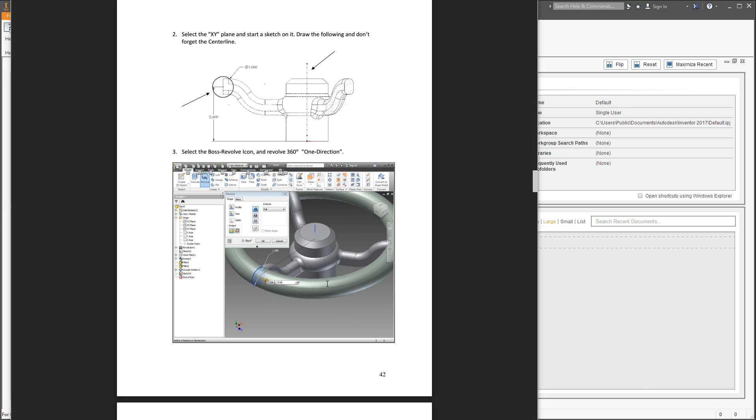Exercise 4, Autodesk Inventor 2017. In this exercise, we're going to take a look at how to build this hand wheel that you see right here. And so we'll begin on page 37 in the book.

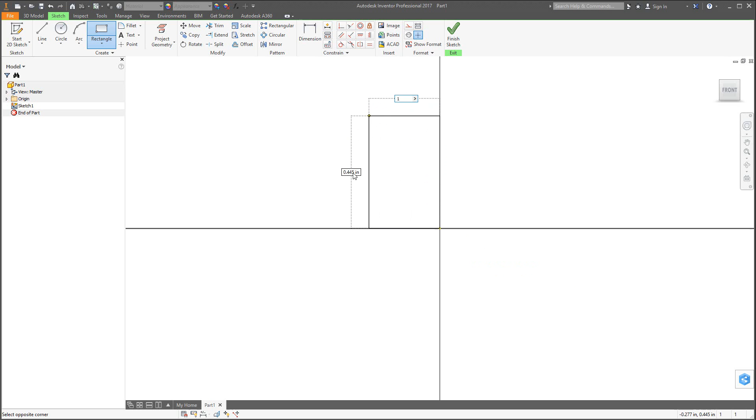You could go ahead and type in 1, and you'll see it will feed into that box, and then click in this box, and this will be 3 inches in height. Now you could click on the front box over here on the right to maximize it.

The next thing we're going to take a look at is the sketch chamfer. Underneath the fillet tool, to the right of it, there's a little arrow. Click on that, you'll find chamfer. This is different from the feature chamfer we've seen in previous exercises where it's actually on the model. This is actually on the 2D sketch.

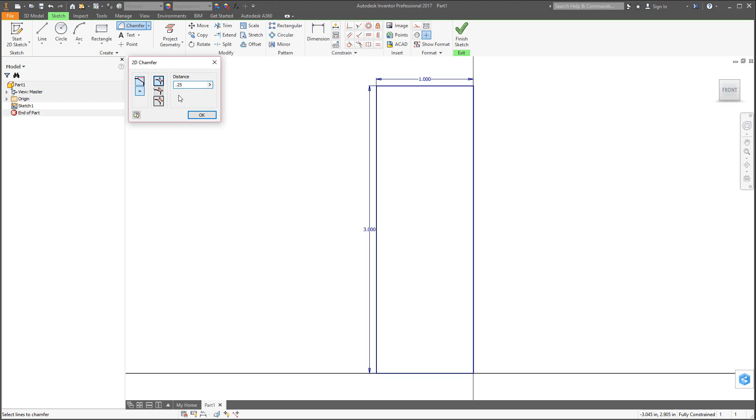We want to have it set to distance at 0.25, and select these two lines at the top and the left side, and you'll see it will create that. Hit OK. The little FX essentially means that 0.25 is dependent on this 25.

So whenever it changes, let's say we change it to 0.125, they both update.

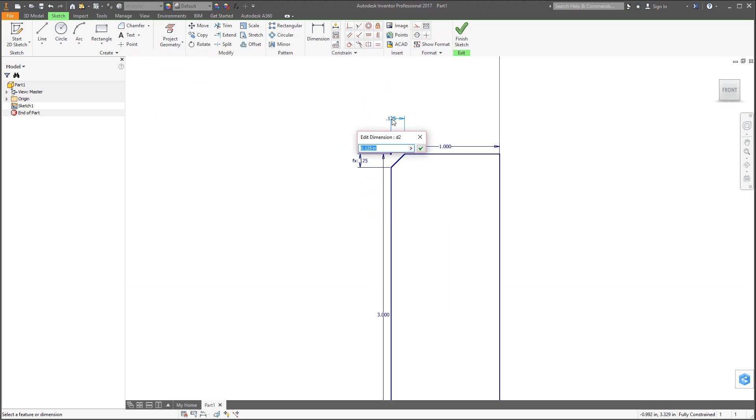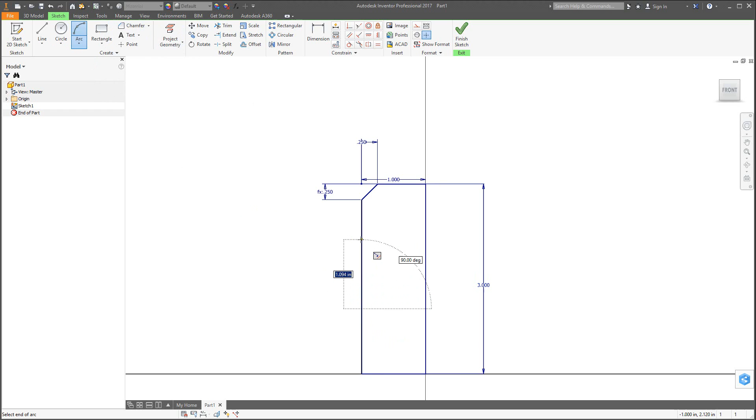Okay, moving along, I'm just going to go ahead and move this out of the way, and we're going to draw an arc. Hit the little arrow underneath the arc buttons and find 3-point arc. Click on the edge of this model, drag up about 1 inch, click again on the edge, and drag out a short arc, not a big arc, just a small one here.

Go ahead and type in 0.5. Actually, just click and we'll add it later.

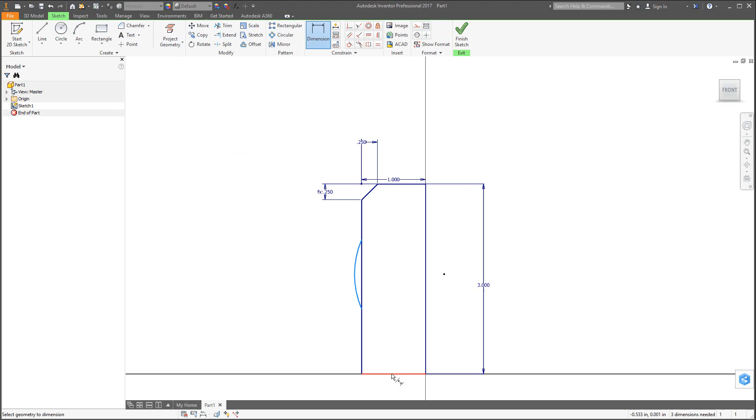Now go to the dimension tool and dimension that arc to the bottom edge, and that's going to be 1.75. Then click on the arc again and dimension it to this left edge, and that's going to be 0.25. Finally, dimension the arc itself at 0.5.

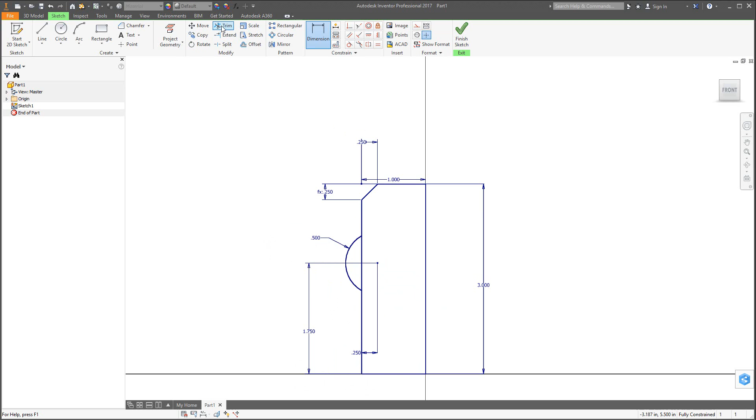Next thing we need to do is trim out this section. So go up here to the trim tool, little pair of scissors, click on it, and just select this intersecting geometry. It should cut up to the next corners.

Now we could go ahead and revolve this 360 degrees. So we'll go to 3D Model, Revolve. I'm going to click on the Home button up here in the upper right just to maximize the screen.

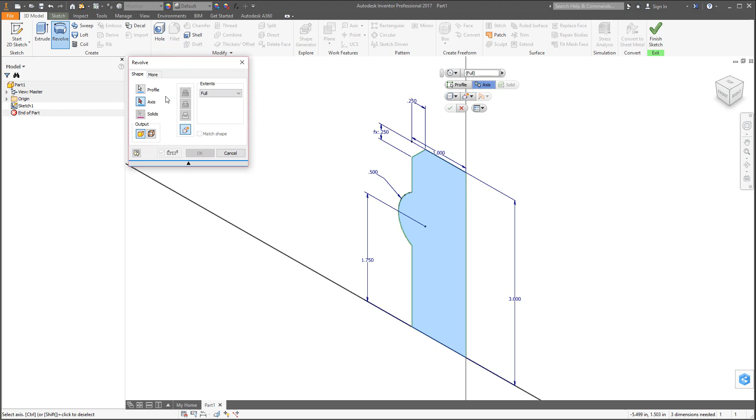All we need to do is select, we'll hit this little arrow here. We need to select the axis. So click on Axis and just select this edge, and hit the green check mark or OK.

Now let's go ahead and start a sketch. Hit the little plus symbol to the left of origins, and we want to go ahead and select the XY plane once again, and we're sketching on that.

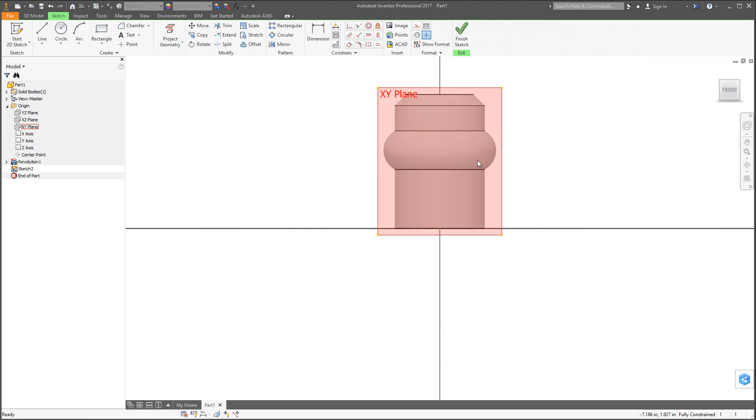Now we could take the line tool and draw a line right in the center here and up. Have it poke out above the top of the part and hit Escape. Now select it after you hit Escape and select this tool here to change it to a center line.

Now go to the line tool and get on that line and click and drag across and make a 2-inch horizontal line.

Then hit Escape. Let's go to Dimension and dimension that line to the bottom edge of the model at 1.75. That way we know we're centered on that hub section there.

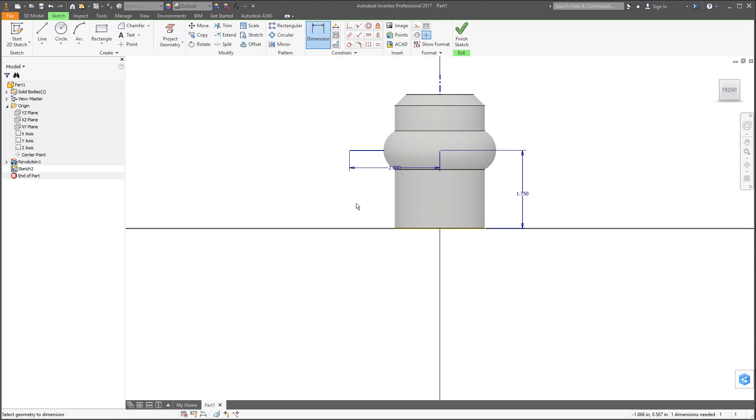Let's now go to the tangent arc tool. On this endpoint, click and drag to the left and up about a 1-inch arc. Okay, we could go ahead and type in one and leave it less than 90 degrees. So one, and mine's like 68 or 70, that's just fine.

Hit enter, and off that one, click and drag off another arc. You can do one of two things: make this 1 inch again, or you could go ahead and add a constraint. I'm going to go ahead and type in 1 inch and hit enter.

Notice that I have tangency symbols located here and there. We will need one up here once we draw a line. So go to the line tool, and off of that line, drag a horizontal line across, and then hit escape. Let's just click on the tangent icon up here and force a tangent relationship between the two, and there you can see that will enable it to be very smooth. I just hit the escape key after that.

Okay, now go to the dimension tool, select this line here and the 2-inch length line, and drag your dimension to the right, and that will be 1 inch.

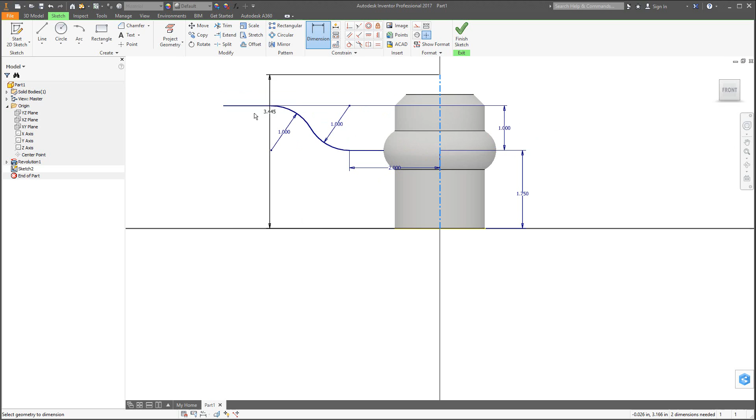The last dimension you could select is the center line and then this endpoint. Now it's going to bring up a diameter, which we really don't want, but that's okay — you could switch it later. We're going to click to drop it, and this needs to be 8.

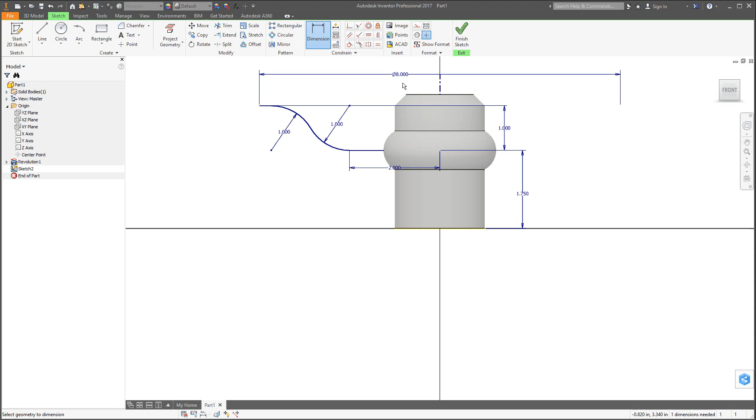If you didn't get a diameter, that's because this was not a dashed line. If it's not a center line, if it's just an object line which is solid, you won't get that — in that case it would be 4 inches. Go ahead and hit Finish Sketch.

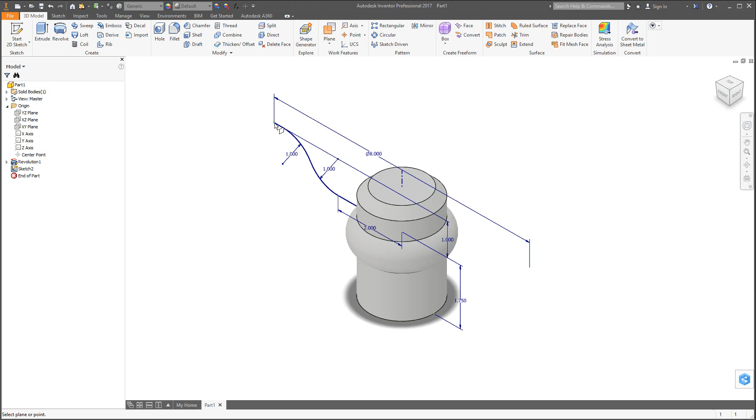Now we're going to learn how to make a plane perpendicular to this point by offsetting. Hit the little arrow underneath plane, and you'll see parallel to plane through point. Select the endpoint where we want the plane to rest, and over here on the left select the YZ plane to project it. Now that you have the new plane there, select it and start the sketch tool, create sketch.

Over here, we could click on this little arrow on the left or right and rotate it until we could see the left side, and then zoom up.

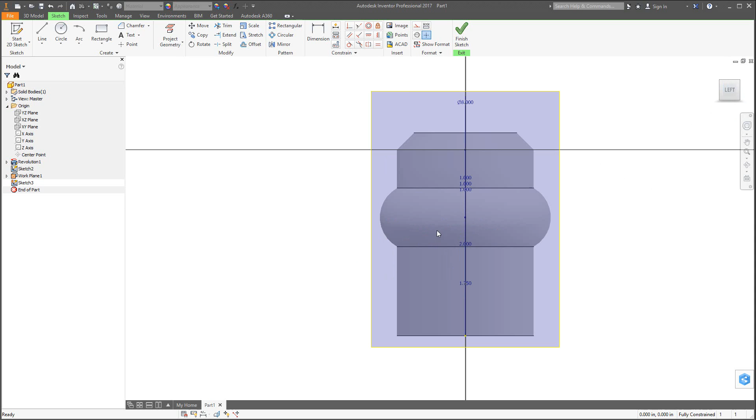Now we're going to use the center point arc tool. Glide up to this point right here, and when you get the dot to highlight, click, drag across, and make it 0.25. Then hit enter, drag an arc over the top, and we want it to be 180 — once it reaches 180, you could hit enter.

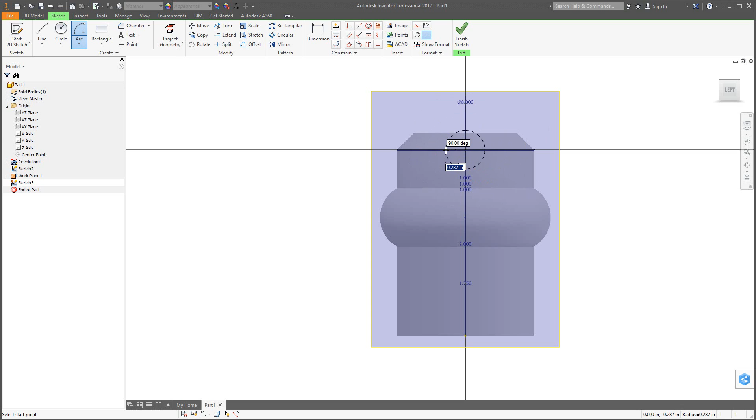Oops, that's not what I wanted. Let me try that again — 0.25, then drag it over the top, and we can type in 180 and hit enter. There we go. Now if it comes out incorrect, hit escape, select it, delete it, and try it again.

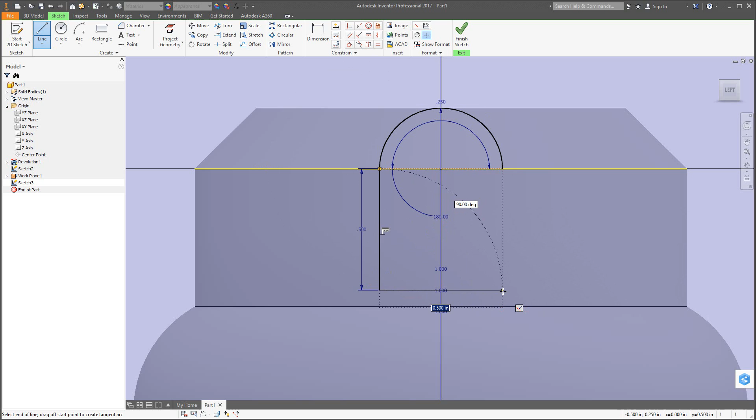Go to the line tool now and draw — I'll zoom up here so we can see this a little better. Click on this vertex here, that arc, drag this straight down, 0.5. Drag this across until you see the little inference line and you're horizontal. If you don't see the inference line, look carefully, make sure you're right below that vertex, and finally close this off right there.

Let's add one more dimension and select this bottom, click to drop it, and hit the green check mark — it should be 0.5. Also, we want to make sure that this maintains a tangent relationship, so click on tangent, click on this line, or this arc in this line. Oh, hit cancel, we don't need that because of what we just did here. Never mind. Okay, now let's hit Finish Sketch, and we could see our profile there.

We can now go to Sweep, select the profile, and then click over here on Path and select any line. Oh, gotta click on that again — select any geometry when it turns red on the path that we created.

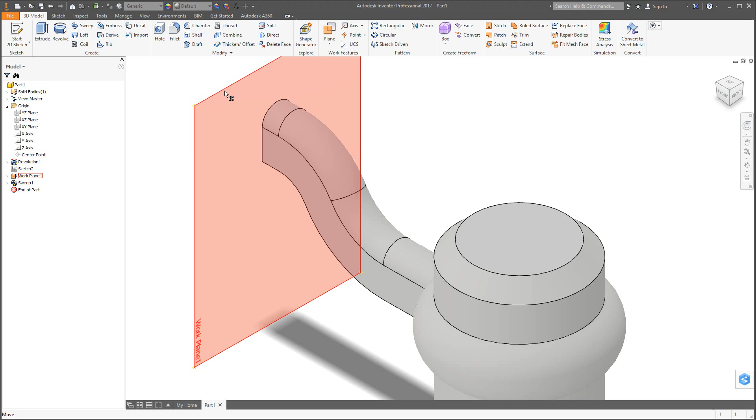Hit OK. Hide the plane by right-clicking on the edge of it, holding down that right mouse button, and you'll see visibility — release it on visibility and it will hide that plane.

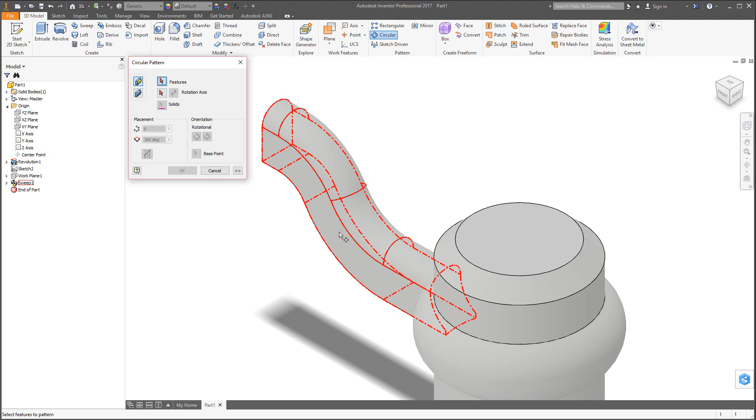Now we want to pattern this. We want 3 spokes, so we're going to go to circular pattern. The features we want to pattern are the spoke, and actually I forgot, I want to add some fillets — I'm going to hit cancel there. First go to the fillet tool, and the first radii are going to be 0.188, and select this edge here.

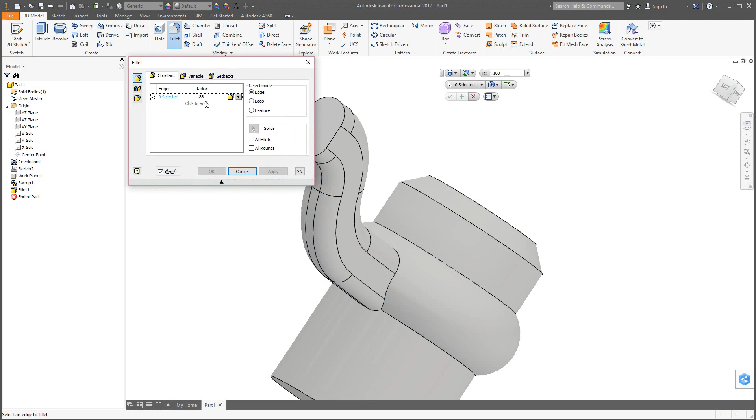If you want to rotate to the underside so you can see it better, select this edge right here. Hit apply. Now set this to 0.25 and just select this top edge — you don't want the bottom edge.

Hit OK. Now we could go back and try our circular pattern. Click on circular, select this side face of the spoke, select one of the fillets, the 0.188 fillet right below here, and then select this 0.25 fillet right here. You could also select them from the browser.

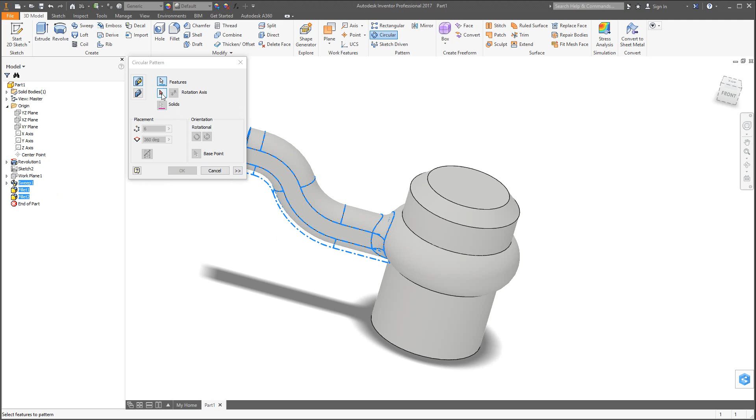Once you have those selected, go to the rotation axis button and click on it. Select the cylinder at the bottom for the rotation axis. Set the placement underneath here to 3 instances at 360 degrees and hit OK.

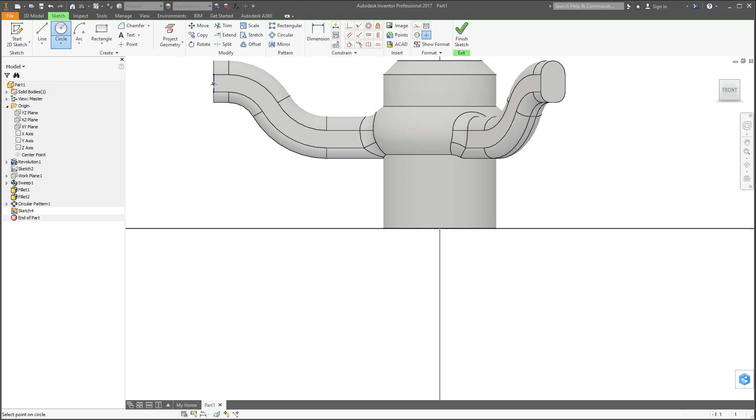Now select the XY plane and start a sketch. Take the circle tool, align it to the midpoint of this edge on the left, drag out a circle and set it to 1 inch.

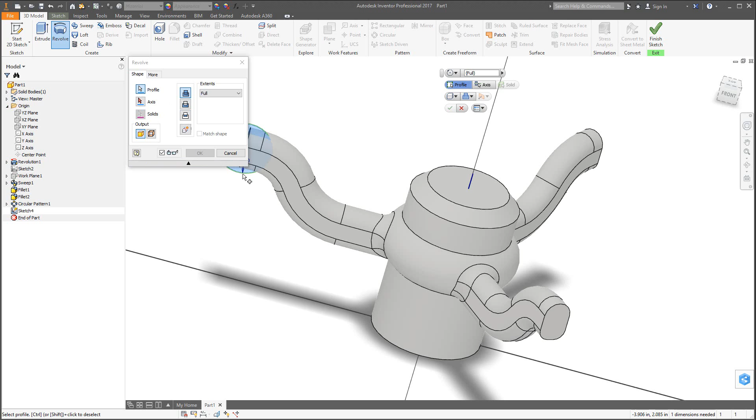Take the line tool and draw a line at the origin and have it appear above like so. Hit escape, go to 3D model and revolve. Make sure you select the profile and then click on axis and select that line that you just drew, and hit OK.

Fillet with a 0.25 radius the additional 3 edges.

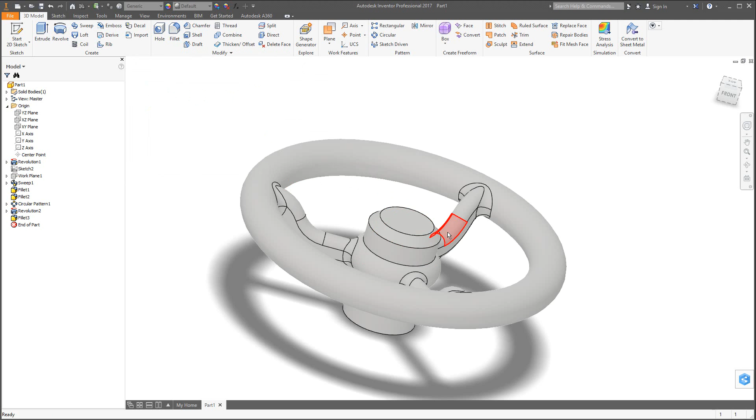And apply. Move it around to the base and we're going to take a look at the hole tool. Click on hole, select counterbore, leave the default settings here with the exception of the termination set to a distance, and the distance will be 1.5.

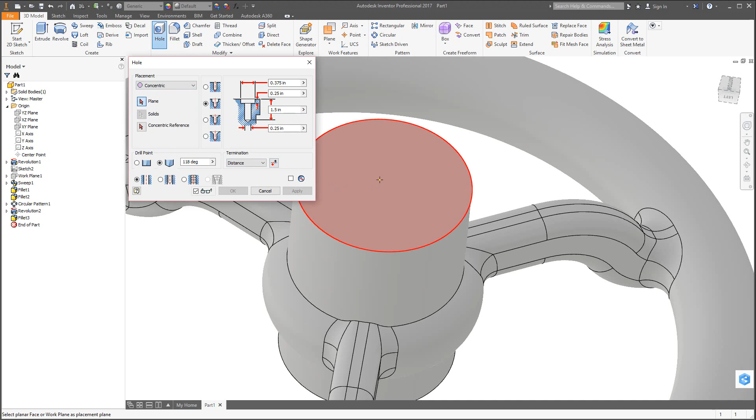On the left here you'll see there's linear from sketch, concentric, or on point. We want concentric. Go ahead and select this face. And now over on the left, select the concentric reference button, and select this cylinder. It then will center it, and you can hit OK or apply. And now we have our countersink, or counterbore in that case.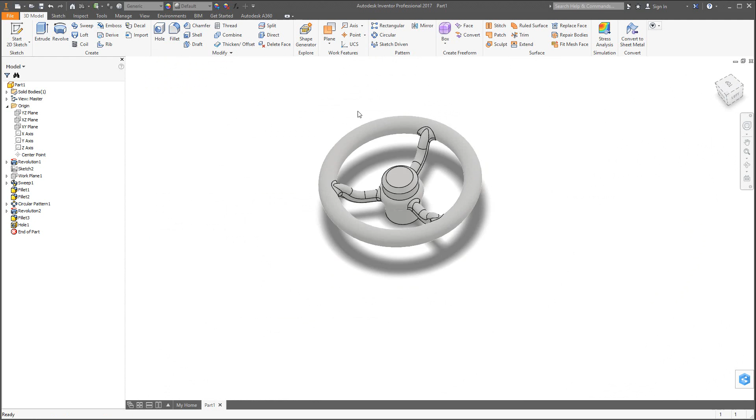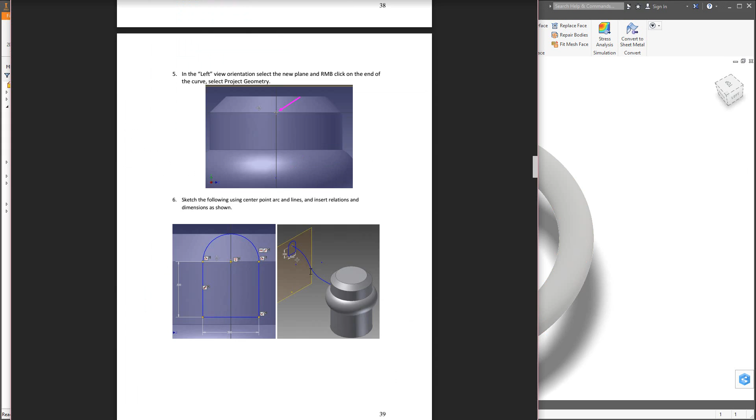And that completes exercise 4. Now the lab is much more complex. And if you're looking at the manual, what we're going to do here is create this plastic part, which was intended to be a Bluetooth headset, which was scaled up in size just to keep the dimensions at an easy option. Okay, so as you can see here, we're going to go ahead and model this. There's several features to do on that one.

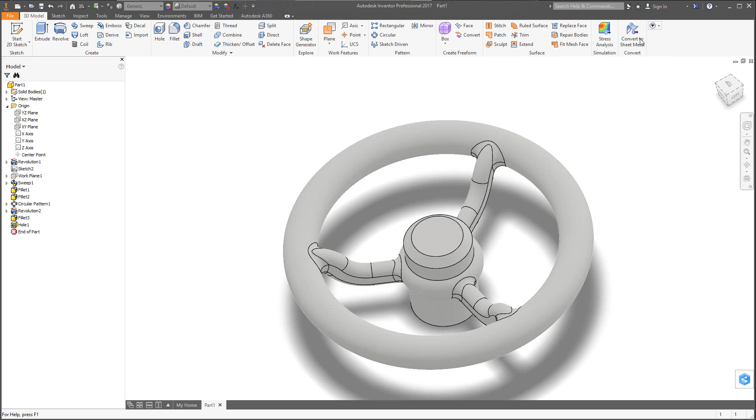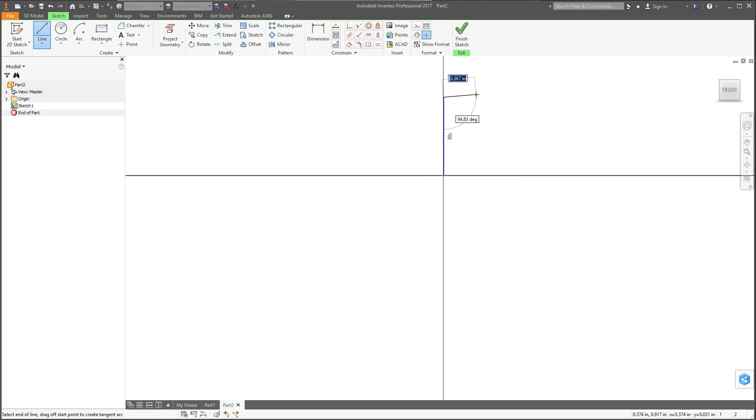I'm going to go to New, Standard IPT, Create. This is not all that dissimilar from some of the other models we've made. So we're going to go ahead and click on 2D Sketch, select the XY plane, draw a line at the origin, approximately 1 inch in height, then hit Escape. Select the line after you hit Escape and go to the center line to convert it.

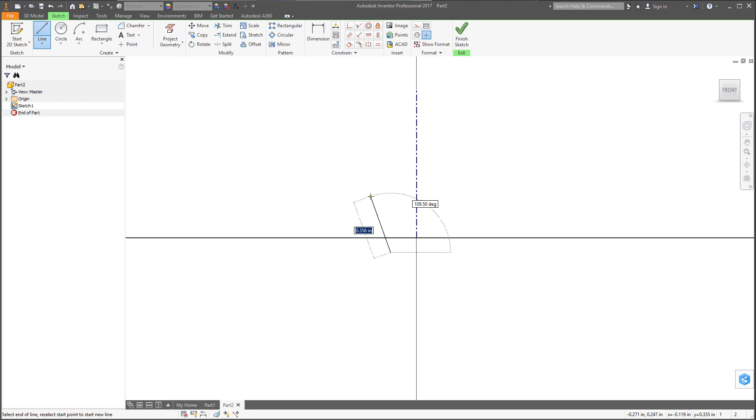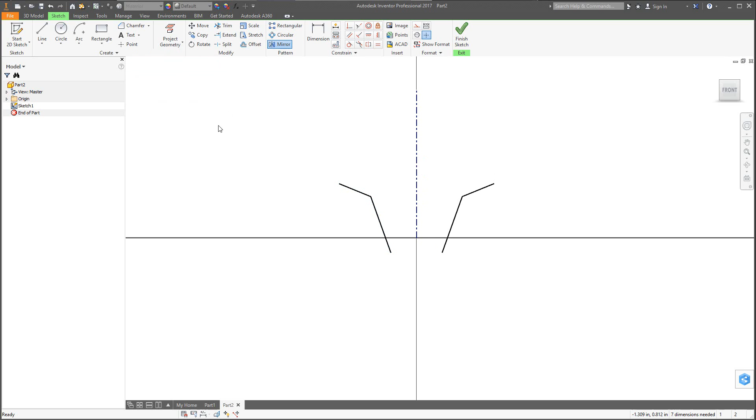Now take the line tool and down below here, just on the left hand side away from the center just a little bit, click and drag an angled line. Don't dimension it. Click again and drag a more dramatically angled line, a short one. Click. Hit Escape. Now go to Mirror and select these two entities here. Select the mirror line button and then select the center line. Hit Apply and Done.

Go to Tangent Arc. Select this bottom corner to this vertex. Then change it to 3-point arc. Click on this vertex and go clear across to the next vertex and drag this out.

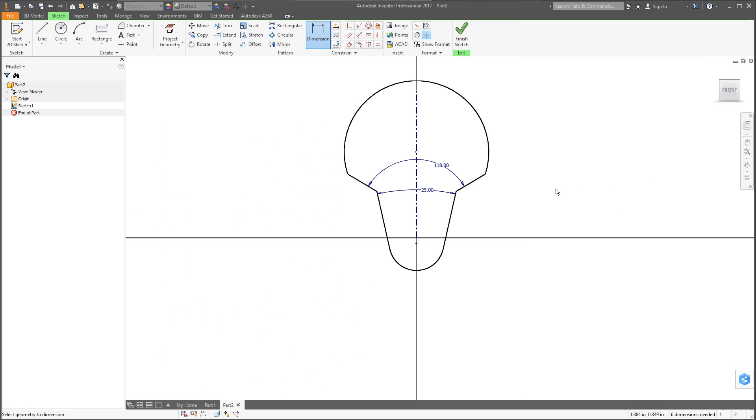Go to Dimension. Dimension these two angles here at 25 degrees, and then these two at 118, and let me verify that because I might be wrong. Actually 115 and 23. And I'm just double clicking on these to change those.

Okay, then make sure you're still in the dimension tool, select this arc, and that's going to be 0.75, and then select the top arc, which will be 1.5, and select the bottom arc to the top arc to add the next dimension, and that's going to be 1.25, and then zoom up a little closer, select the bottom arc to this corner and drag that out.

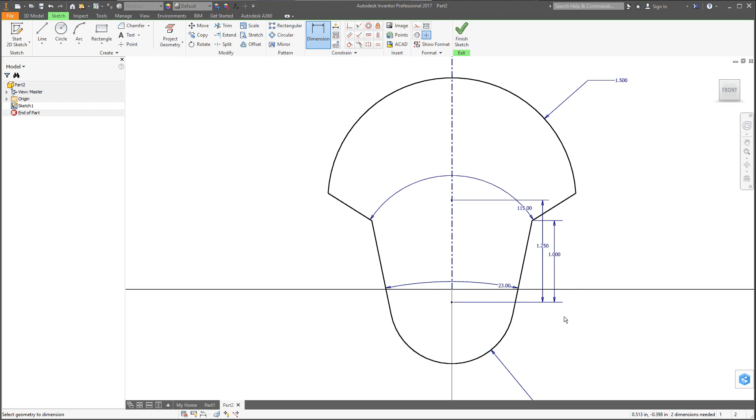That's going to be 0.25. Actually, that's going to be 1, sorry. Double click on it, type in 1. Hit escape, grab this center point, drag it down, and drag it back up to the origin and have it snap when you see the green dot.

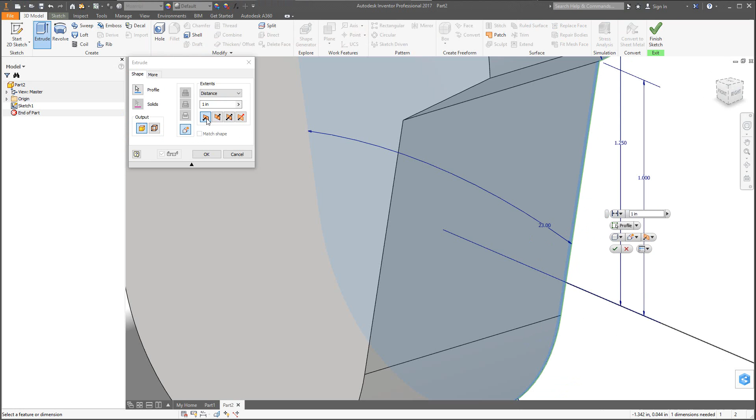Now we could go to 3D Model, Extrude, and let me move this out of the way here. The thickness needs to be 1/2 inch with 25 degrees of draft. So let's put in 0.5 and then go to more, and there's going to be minus 25 degrees of draft. Hit OK. Now go to fillet, and the fillet that we need, the first one is 0.5, and select that edge and hit apply.

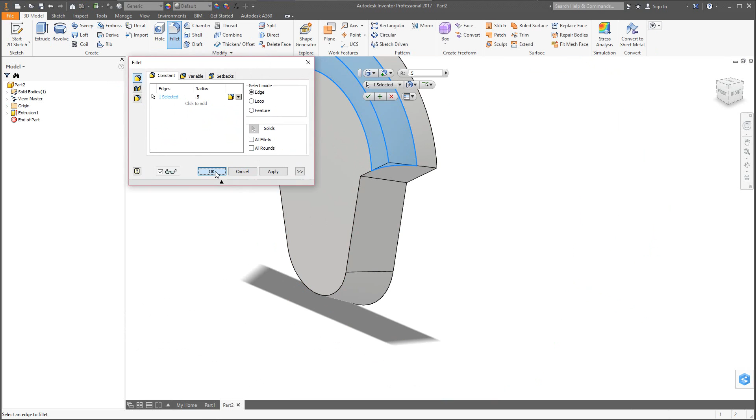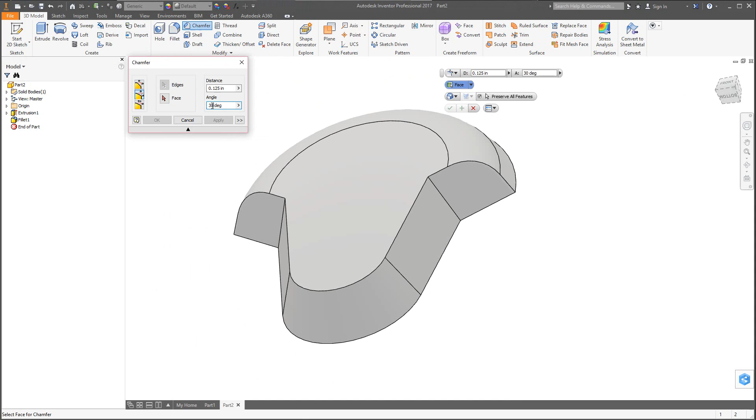Now use the chamfer tool. The chamfer is called out in gray here, 30 degrees at 0.125. So here we want distance and angle, 30 degrees, 0.125. Select the top face and then the edge. Hit the green check mark to apply.

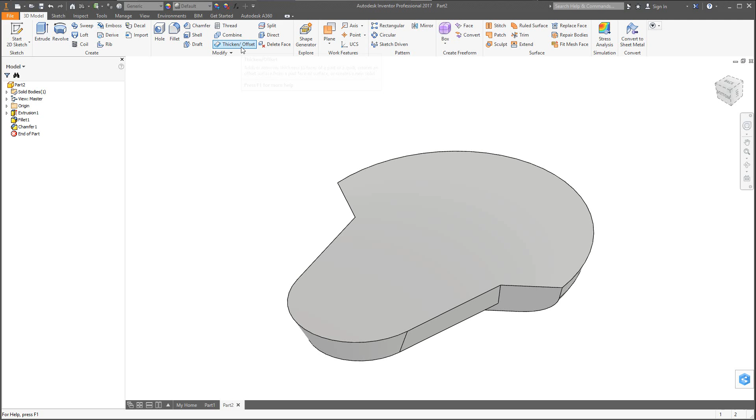Now we're ready to shell it. Rotate it around the back. Go to the shell command. And we're going to set the thickness to 0.06. Make sure the decimal place takes in that. So 0.06. Double check to make sure the decimal shows. Then click on this face on the back and hit OK.

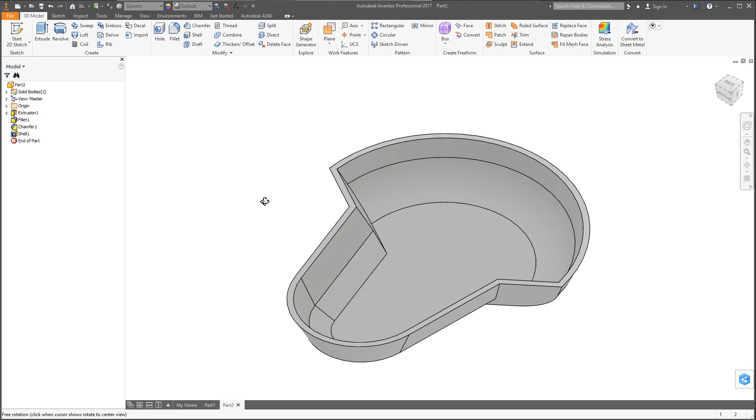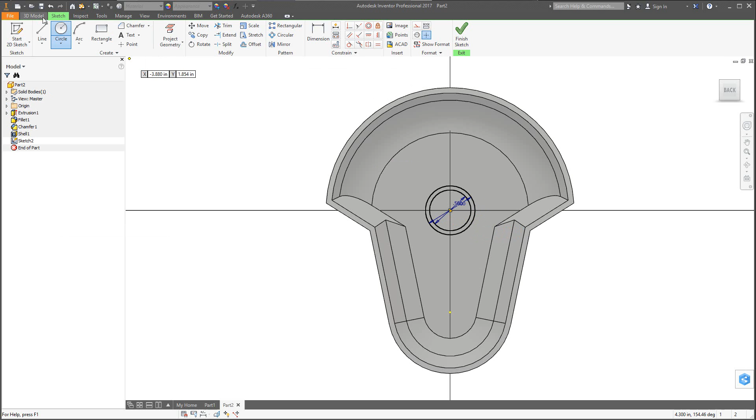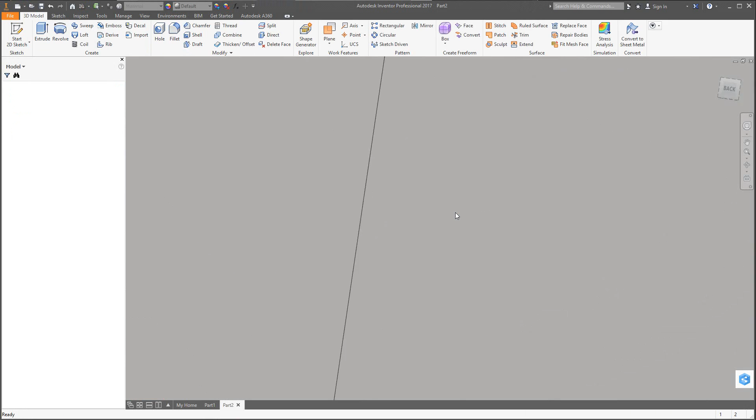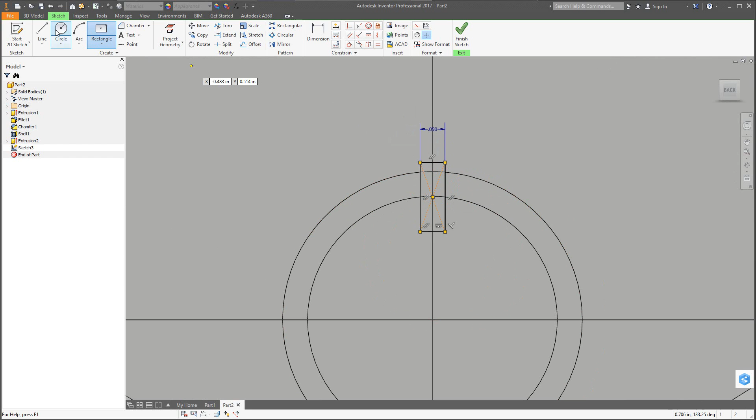Select this face here and start a sketch, and zoom out, and we want to center this, so we're going to take a 2-point center rectangle and just get it on this bottom edge, drag it out. The width will be 0.05, and the length doesn't really matter so long as it goes beyond the boundaries of the circle. Now we could go to 3D Model, Extrude, and we want to remove material 0.1. So I selected cut there.

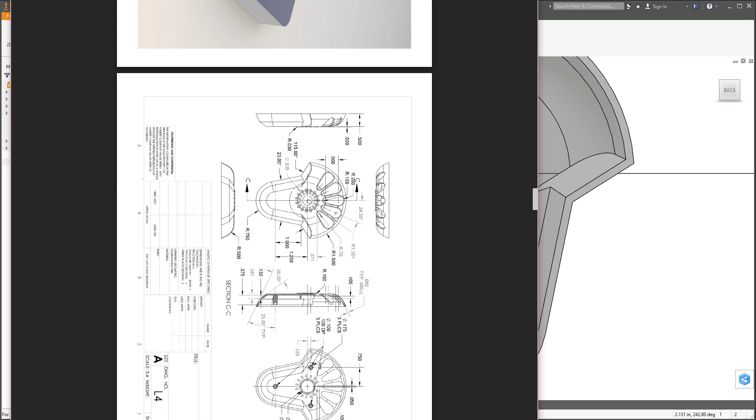Now select this face again and start a sketch. Take the circle tool and draw a circle across here. Let's take a look at the dimension needed, 0.175.

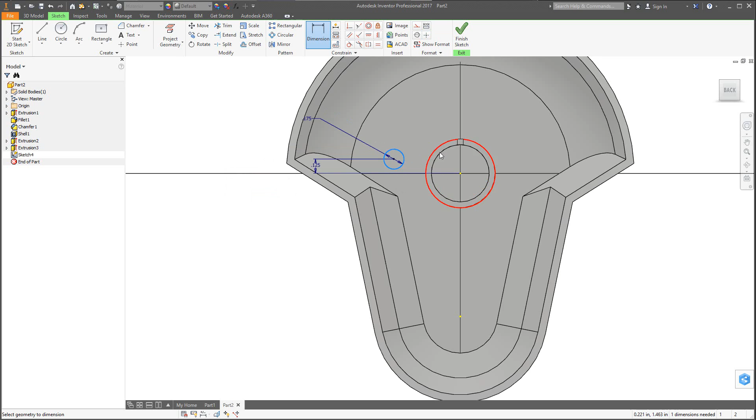And then it's dimensioned aligned to this circle, 0.125, and dimension again horizontally, 0.75. And now we'll go ahead and we'll take a line and we'll draw a mirror line. Hit escape, select that center line.

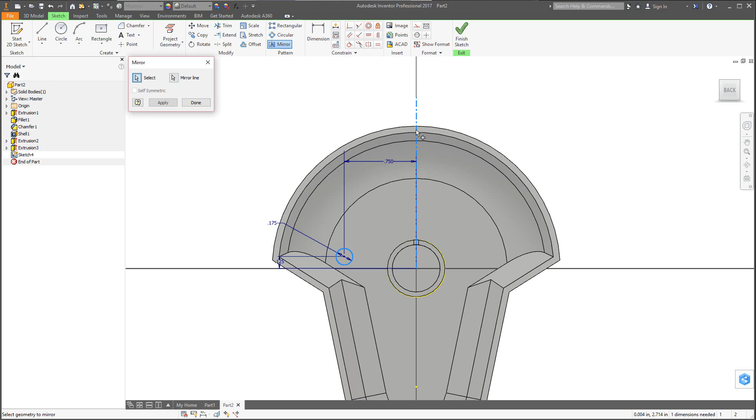Unfortunately, I'll have to move this out of the way. Select that line and turn to a center line. Now we could go ahead and mirror. Select the mirror tool, select the circle, click on mirror line, select the center line, and hit apply. Add one more circle down below, and then go to equal up here to add an equal relationship between one of the circles up top to that circle, so they're all the same size.

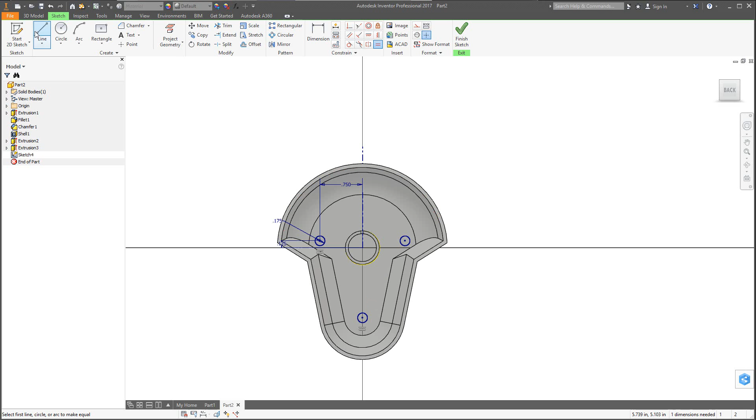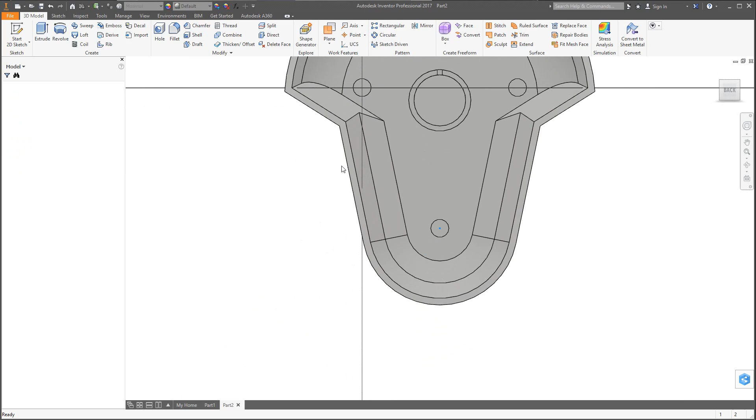And now we can extrude that. 3D model, extrude, select the three entities, and we need to specify the height at 0.375. Now select those faces, or one of those faces, start a sketch. And draw circles in between each one of 0.1.

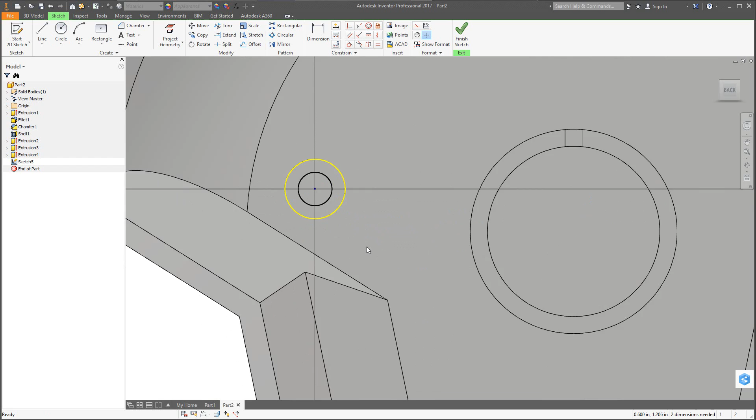And you have to give it a minute to wake up the center. And actually what I'm going to do is I'm not going to dimension these individually. I'm going to get them close to size, and then I'm going to go to equal and assign equal value, so if a change ever comes down, I could actually just go ahead and make a change to one of them versus all of them.

Now I'm going to go to 3D model, extrude, and select those interior holes, and those need to be cut 0.1 deep, and select cut and make sure it's pointing down, so I'm going to have to hit direction 2. Hit OK. Alright, we'll take a look at the front now. Select the front face, start a sketch.

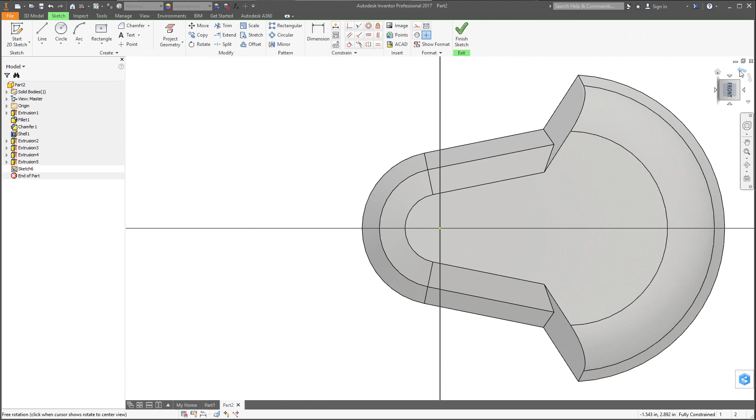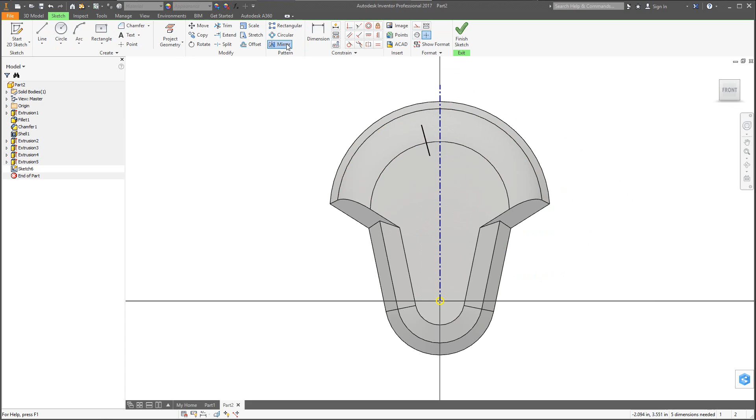I'm going to use the counterclockwise rotation up here. Again, I'm going to draw a line centered, and then I'm going to select it and convert it to a center line. I'm going to take the regular line tool and up here draw a little angled line, and then go to mirror, select that little angled line, and then go to mirror line and select the center line. And hit apply and done. Use the tangent arc tool to close those off.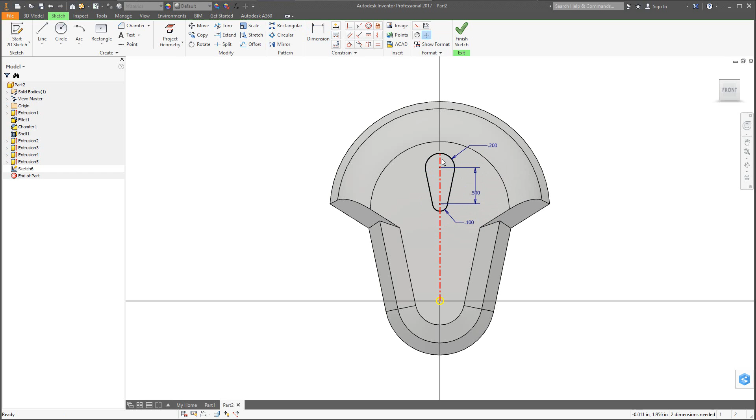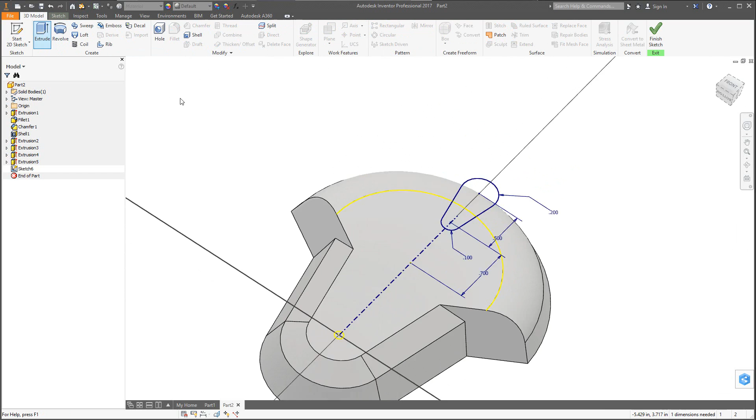Go to dimension. The bottom arc is 0.1, the top arc is 0.2, and the distance between the two is 0.5. And now we have to get this up here, and the dimension for that is specified in the bolt circle, which is 0.7. So go to the dimension tool, select this arc to this arc, and that will be 0.7. Now we'll just cut that. 3D model, extrude, select the profile, make sure it's set to cut and all.

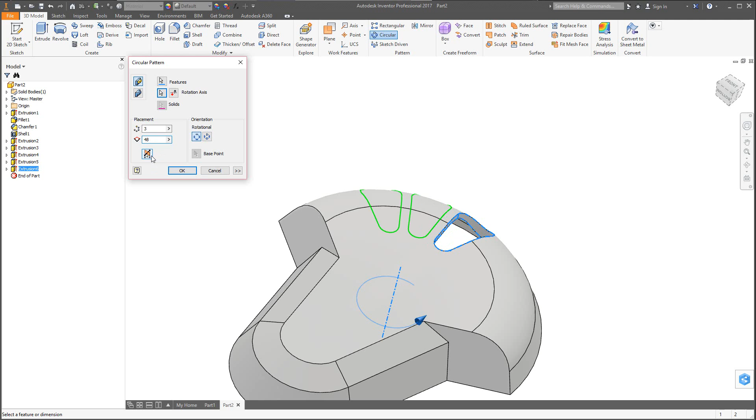Now we could select that feature and go to circular and click on rotation axis. Let's try that again. Select this face and we'll see the pattern. We actually want 3 instances at 24 degrees. Oh, in this case actually we need to double that, so 48. And let's see actually if we could divide that up. Set it to 5 and 96 degrees. Hit OK.

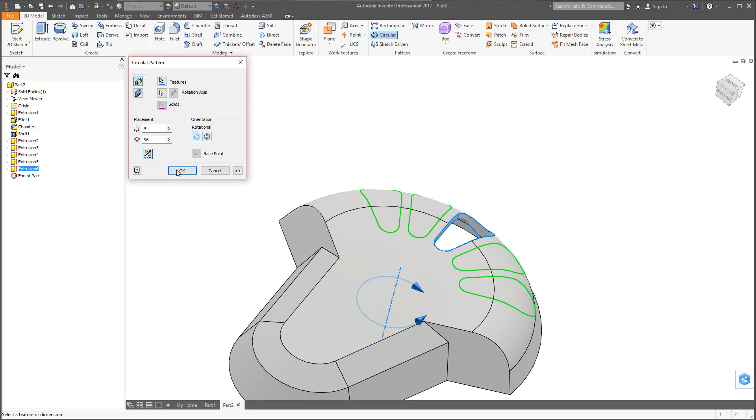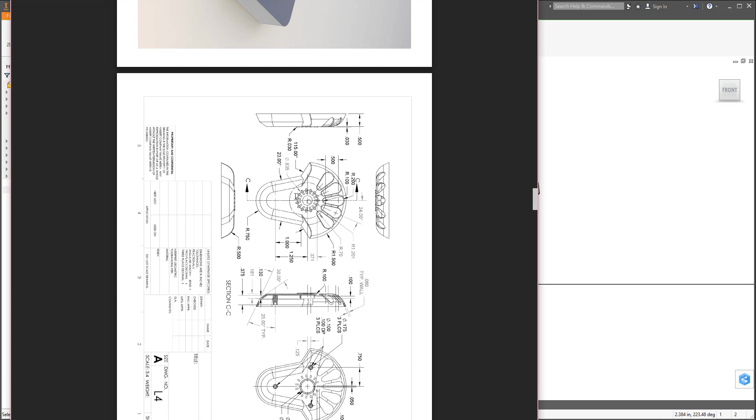Okay, now we could go ahead and select this face and start another sketch. Now we create that boss. Locate the center, let it wake up. There we go. Click on that. And this is going to be 0.835. Go ahead and extrude that 30 thousandths in height, so 0.03.

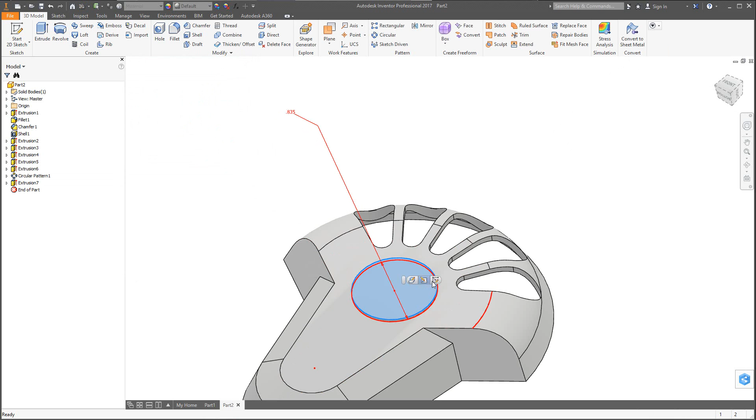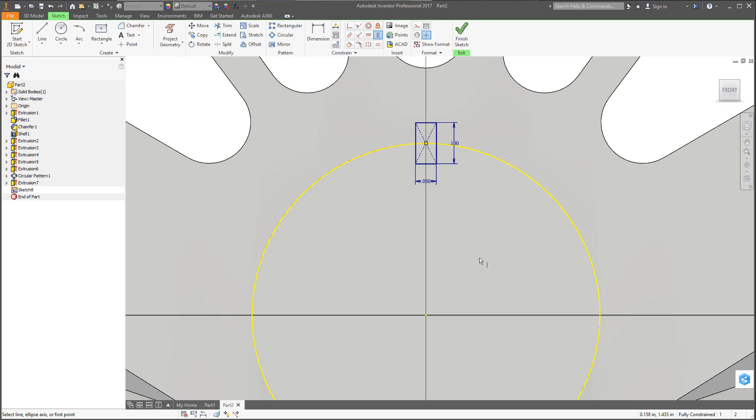Select that face and start another sketch, and let's make a cutout: center rectangle on the center here, in this quadrant I should say, and then this needs to be a width of 0.05, and then this needs to be 0.1. Hit escape, select the centers. Actually, I go to vertical and make these aligned. Should have actually done that on the other side too with the other one that I made on the inside of the part, but that's okay.

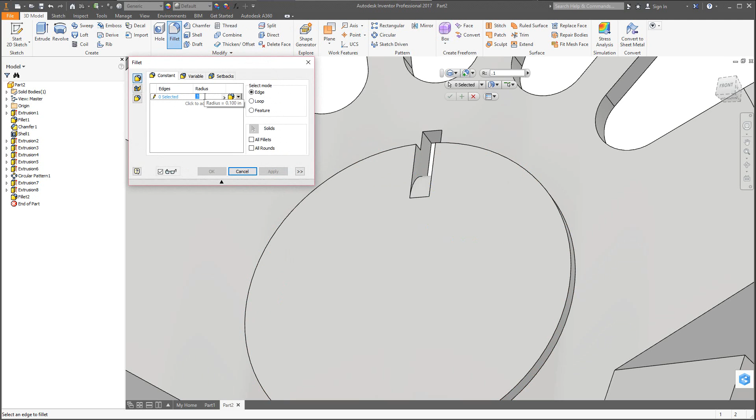I'm going to go to 3D Model Extrude, select the profile, select remove material and all. Now go to fillet and put in a 0.1 fillet right on this edge here. Apply, and then put a 0.03 fillet or radius on this edge, and OK.

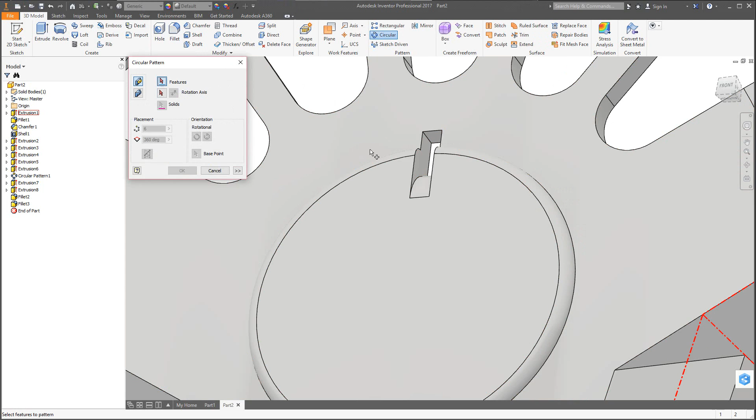Now we need to copy this. We're going to put 16 of those in. So we're going to go to circular. The features are the cutout and the fillet. Click on the rotation axis and select this edge, or actually you might have to select this outer face here, and put in 16 and hit OK.

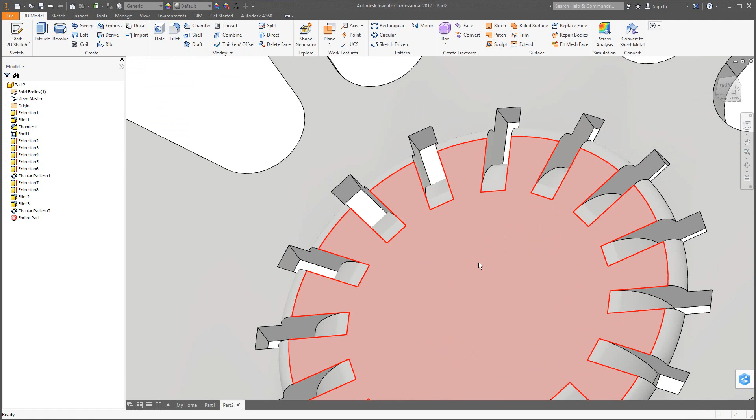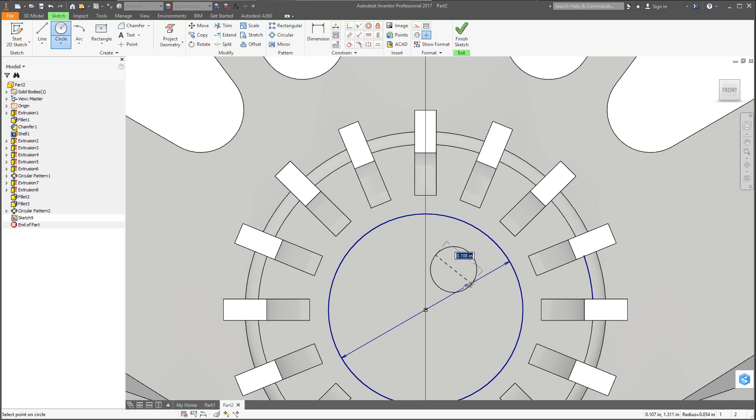Now I don't have any dimensions for the logo, just select that face, start a sketch, and you could draw anything in there that you want. I actually just went ahead and drew, let's wake up that center, this out approximately 0.45, and then offset around here, it's like the earth and the moon in front of it, about 0.15.

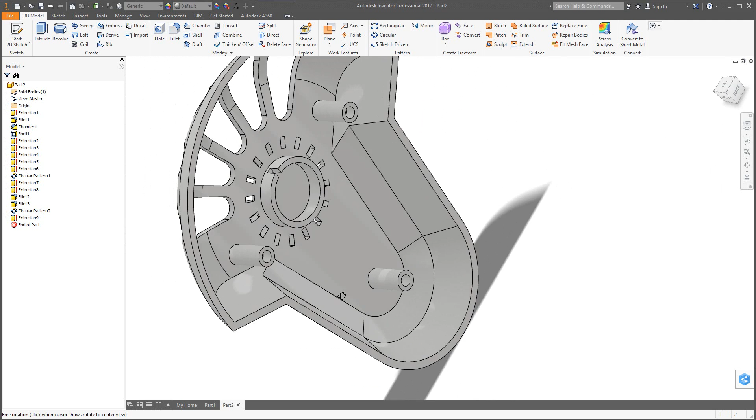And now just go to 3D Model, Extrude, select the profile, cut 0.01. And that completes exercise 4 and lab 4.